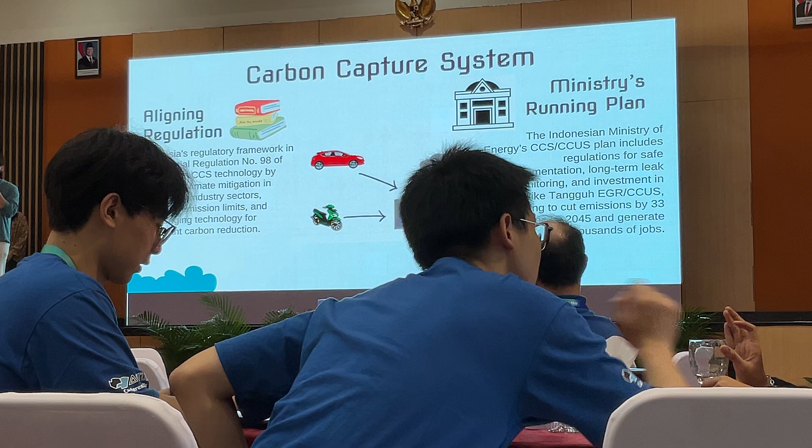So if we want to convert all public transportation into electric, won't we need more power plants for that? Correct. And by needing more power plants, doesn't that mean more emissions? Correct again. But the difference is, if we concentrate the emission at the power plant, we change it from a distributed source—the vehicles—to a concentrated source—the power plant. So what's the benefit? There's a technology called carbon capture system, which, just like its name, captures the carbon from the concentrated source. This is actually aligned with our 2021 regulation, which greatly supports carbon emission reduction.

Then there's our ministry's running plan, which, if the project succeeds, will create thousands of jobs while also reducing emissions by 33 million tons. So it's not just killing two birds with one stone, but killing many more.

So why don't we all just sell our cars right now and buy Tesla Cybertrucks? Because it's too expensive. But there's a recent study from Antara News showing that over the past 15 years, battery prices have declined by over 90%. And Goldman Sachs, a renowned American investment company, predicts it will drop by another 40% by 2030. So it will drop even more.

And our government, through PLN—an organization we visited yesterday—is creating over 600 charging stations right now, targeting 25,000 by 2030. So availability for electric vehicles will increase even more.

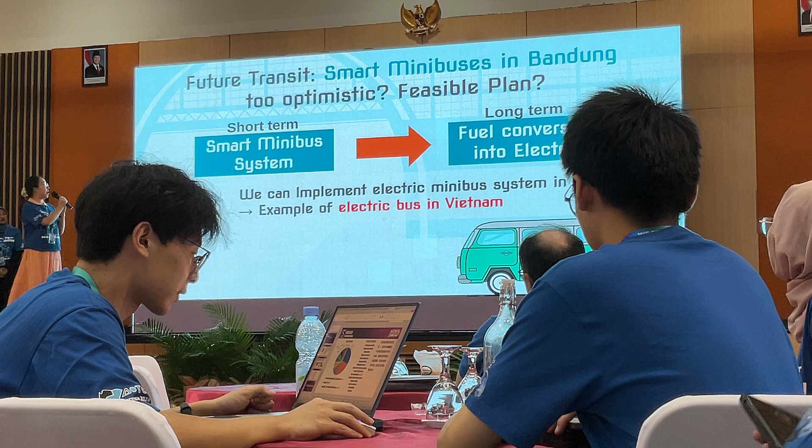Okay, so far we talked about the future transit smart minibuses in Bandung. So as a short term, we suggested a smart minibus system. We focus on the convenience of the minibus. We want people to use public transportation rather than private vehicles.

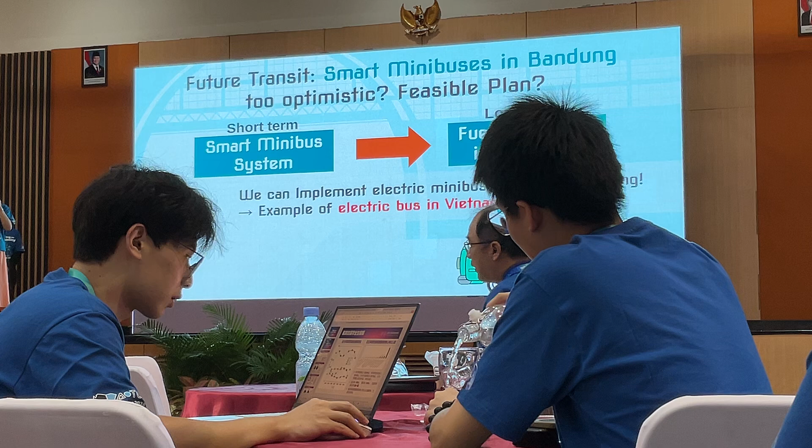And in the long-term plan, we focus on the fuel conversion into electric. So we want to change gasoline minibuses into electric minibuses for a more sustainable energy way. So if we can accomplish these two plans successfully, it is obvious that we can change Bandung into a more sustainable and safe road situation.

But isn't it too optimistic? Is it really a feasible plan? Actually, we can do it because there is already an example in Vietnam. Vietnam is already using electric buses as a transportation method. So let's move on to Vietnam.

Thank you for your introduction. Now I'm going to tell you about the electric bus in Vietnam, its effectiveness, and the sustainability of our solution for Bandung minibus energy.

It's very friendly to the environment. Second, according to statistics, Hanoi's introduction of electric buses is reducing around 40,000 tons of carbon dioxide emissions, which is equivalent to 1.68 million trees. Impressive figures, right?

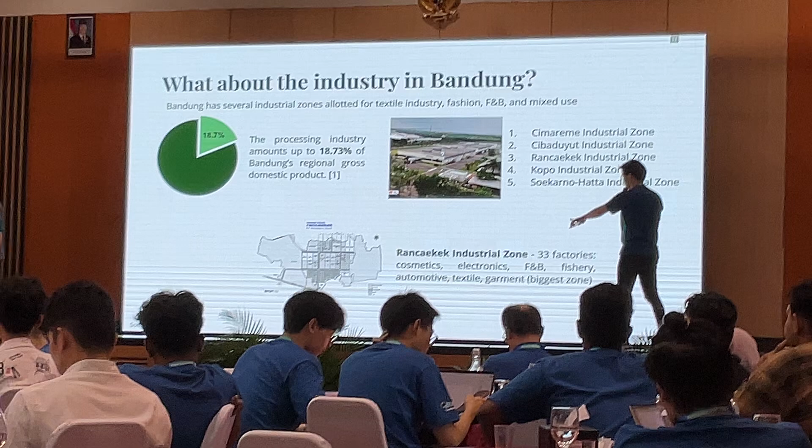We will focus on Rancaekek Industrial Zone, consisting of 33 factories doing cosmetics, electronics, food and beverage, fishery, automotive, and most of all textile and garment.

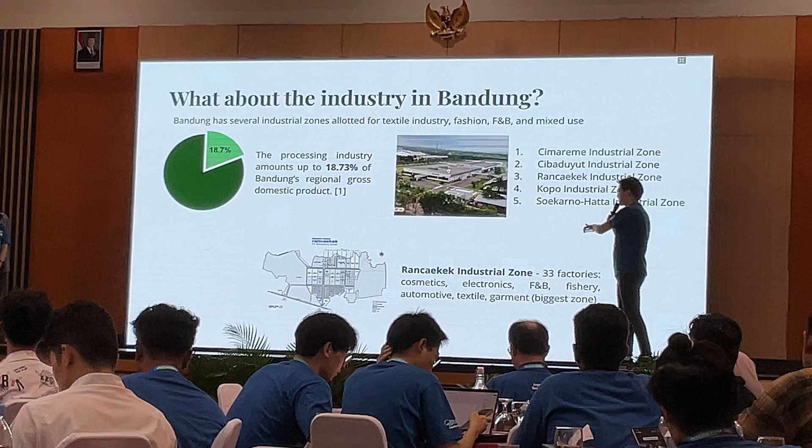But the problem is Rancaekek Industrial Zone is currently experiencing up to 60% decrease in groundwater levels. This indicates very intensive groundwater extraction, meaning the factories were found to be fetching groundwater more than the permitted amount, or more than they are allocated for.

Because of that, demand is substantially larger than the supply, and the groundwater level is steadily decreasing, even until now. So this is the issue that we focus on.

Groundwater crisis can be divided into three aspects. First, industrial water use, because the industry is using more and more water and the water supply is depleted.

We also have reduced absorption area because developing industries need buildings. When you build on top of soil, you compact the soil, reducing its absorption capability, and you also have less soil area for water to be absorbed.

And we also have deforestation. We need to clear land to make more space for buildings, for the industry to thrive. So this is the problem we are facing right now.

Let's look at the global solutions. Of course, we will look at specific solutions and practices, but these are hard to implement because China, Japan, and South Korea all have different culture, different technologies, different capitals, different political situations, and different education backgrounds. They are all so different.

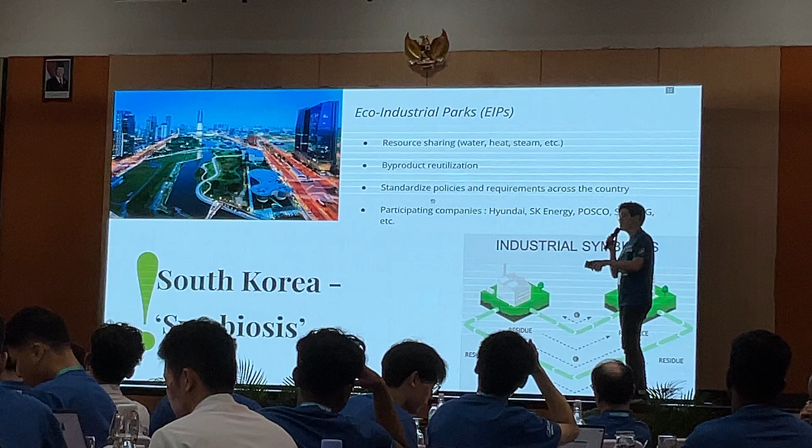In the Eco-Industrial Parks, we have resource sharing. Water, heat, and steam is shared between companies, industries, and factories. This is made possible because in EIP there is an extensive underground network of water, heat, and steam sharing systems that allows companies to do so.

They also do byproduct reutilization. This company sends their residue or waste to another company to be used as raw materials. This company doesn't have to worry about waste disposal, and that company doesn't have to worry about raw materials.

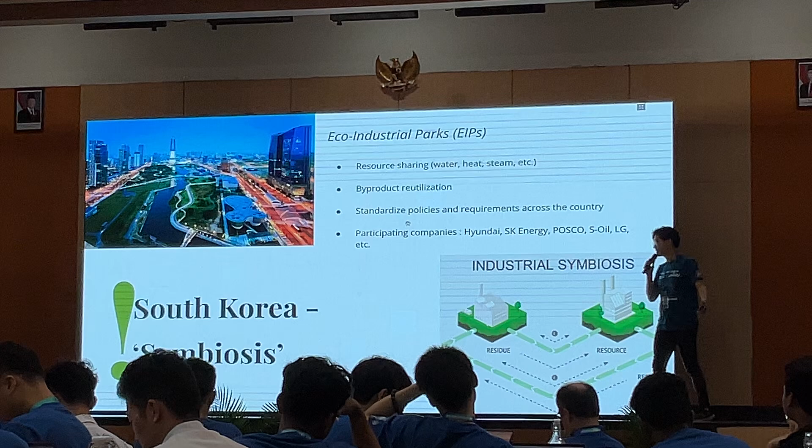Win-win solution. These EIPs can also standardize policies and requirements across the whole country. You don't have to enforce your policies on specific factories or companies, but you can enforce them in specific parks, which makes your job a lot easier. Participating companies include Hyundai, SK Energy, POSCO, S-Oil, LG—large companies everybody has heard of.

Next we have Indonesia. Indonesia has also been doing these things and is heading in this direction, joining UNIDO's Global Eco-Industrial Parks Program, GEIPP, in 2020.

Indonesia is also building an energy management system through the Benefits project. One-third of industrial parks plan to use solar photovoltaic cells and bioenergy, implementing that into their energy mix, and also following China's optimization scheme, adapting advanced manufacturing approaches, benchmarking against China.

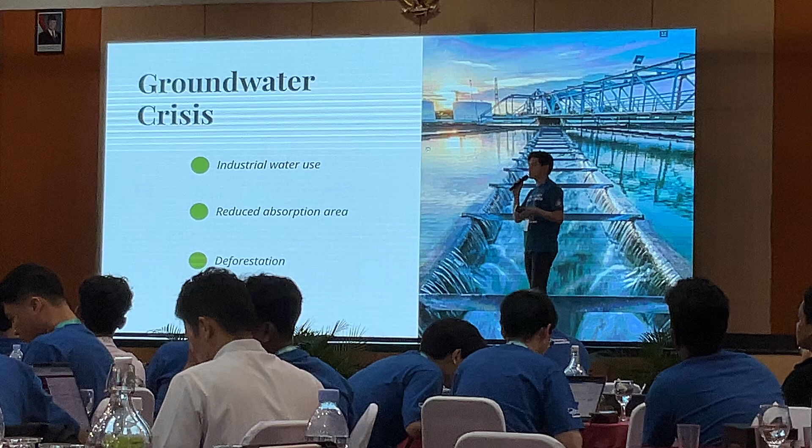Next, I remind you again of the problem in Bandung. Let's go back to Bandung for a bit: a groundwater crisis caused by industrial water use, reduced absorption area, and deforestation. How can these global solutions, these themes, help these issues? We propose some solutions.

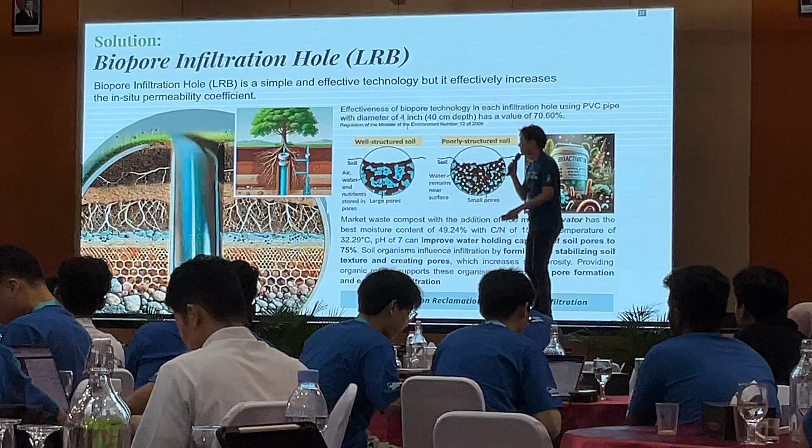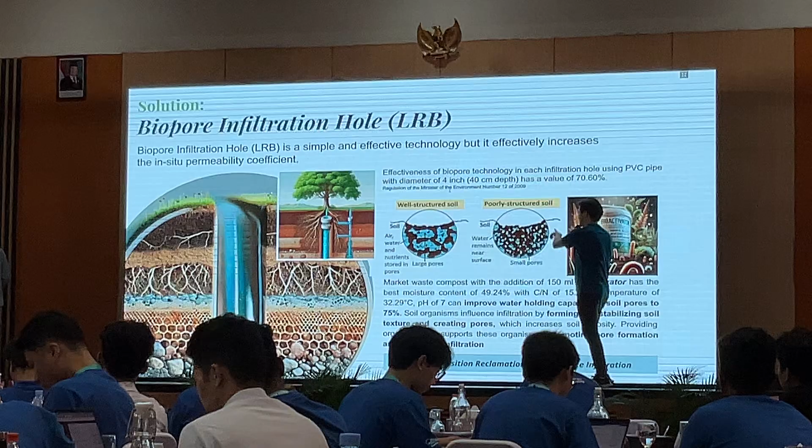First solution: biopore infiltration holes. This is a simple, cost-effective technology that increases the local permeability coefficient so the soil can absorb more. As the soil gets compacted due to industrialization, we need to recover some of those pores—we can just make some more holes, which improves the soil's ability to absorb water mechanically.

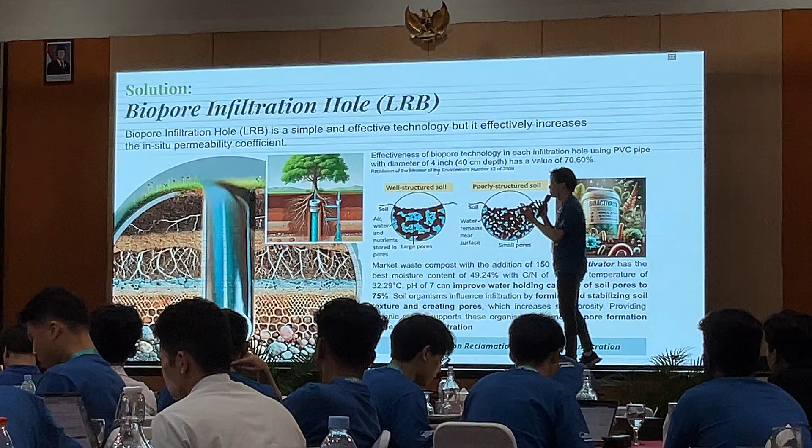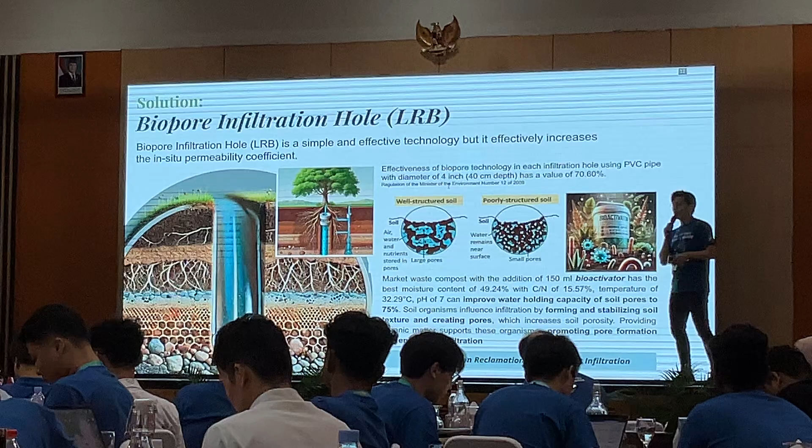We can also improve absorption non-mechanically by adding bioactivators. Joining mechanical and non-mechanical ways, we can improve the water retention of the soil and its absorption coefficient, optimizing the existing process. The soil can already absorb water, but we want to optimize it and maximize infiltration, following China's optimization mindset.

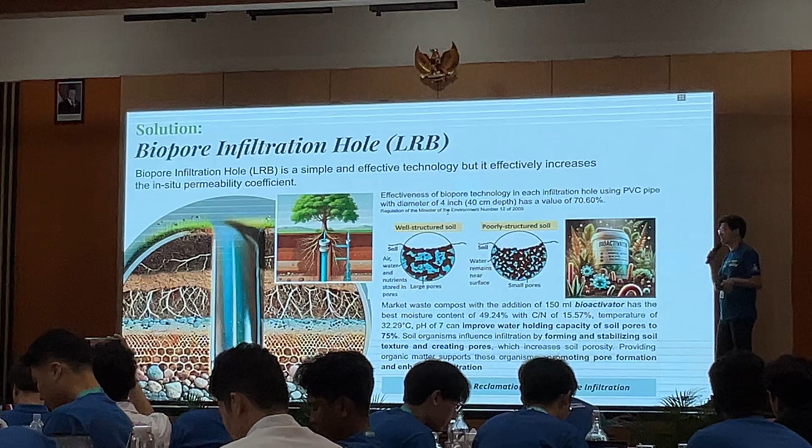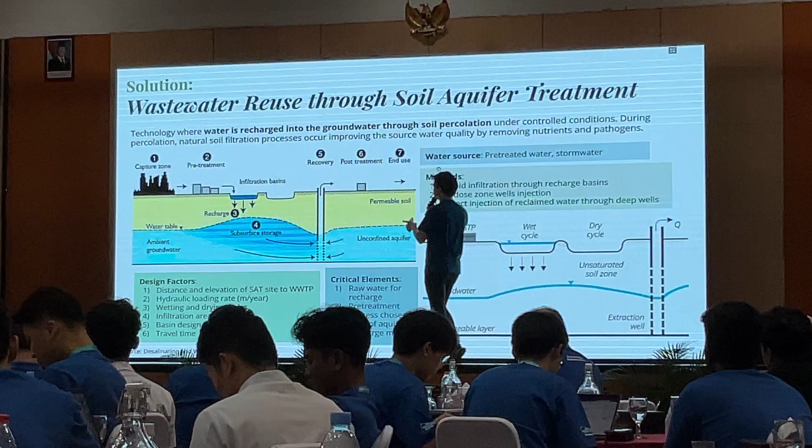Next, let's expand our scale a little and think bigger. We have soil aquifers, where we force water back into the ground by collecting it and letting it drain through the ground—here we have natural filtration.

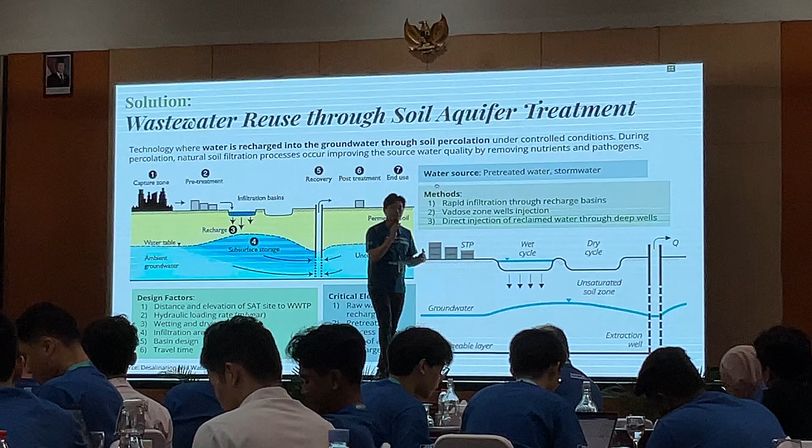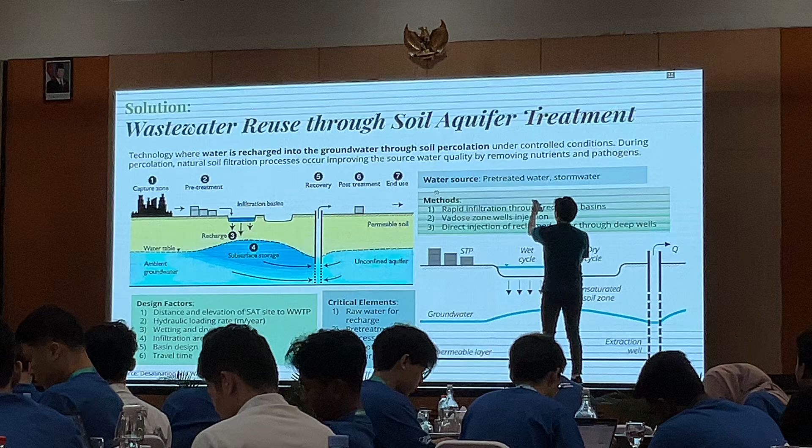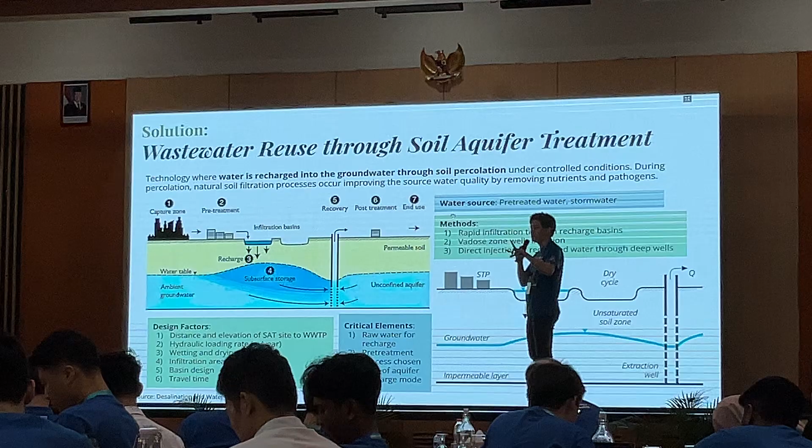But now, since it's a bigger scale, we need the help of the government to centralize and support this effort to make it possible.

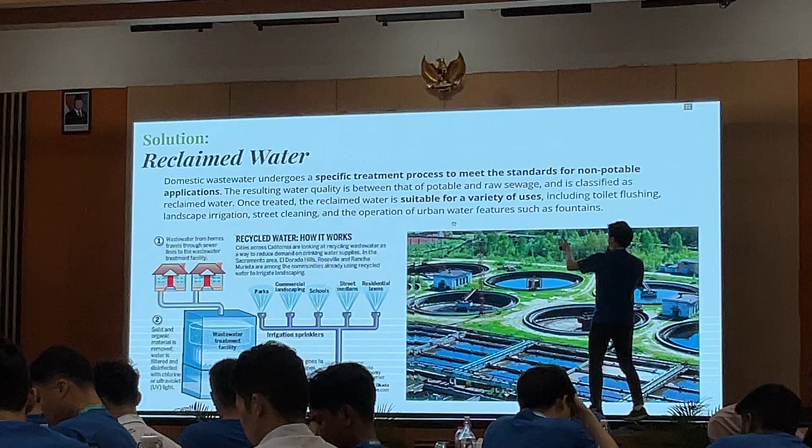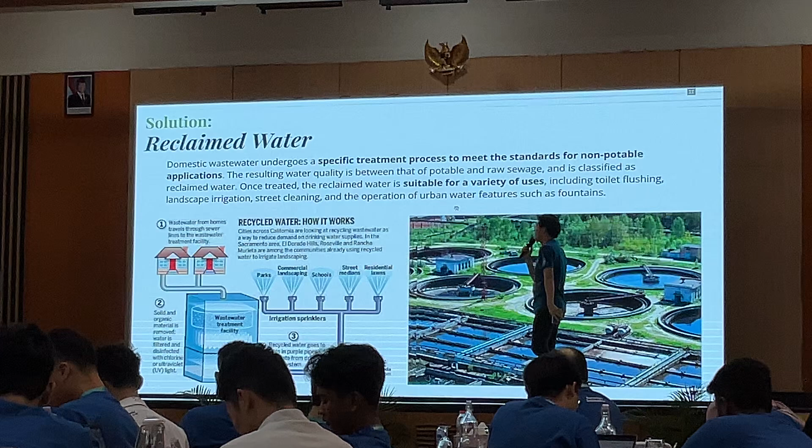Next, reclaimed water. Wastewater can be treated to meet standards for non-potable applications, such as toilet flushing, landscape irrigation, street cleaning, and other domestic uses. But I want to focus on industrial applications.

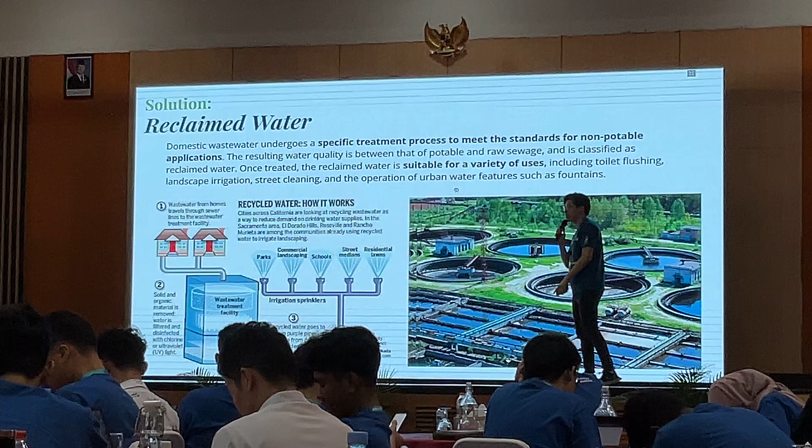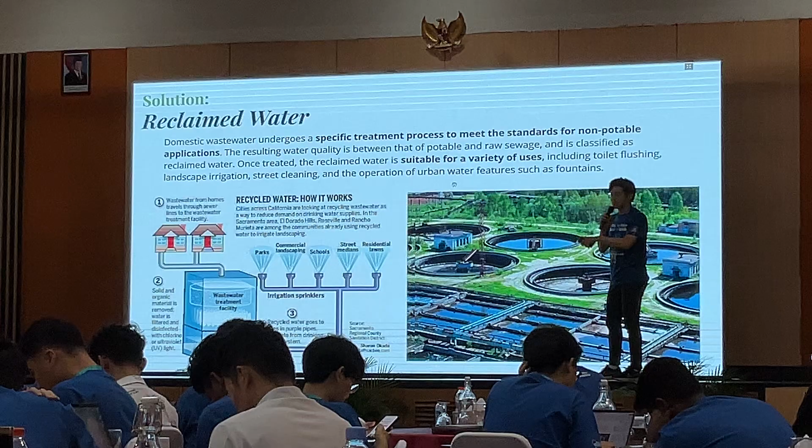I want to use this non-potable water for sharing between industries. Wastewater from one industry gets treated, and if possible, reused by another industry, creating industrial symbiosis. Since this water treatment plant is not cheap, we need the help of the government.

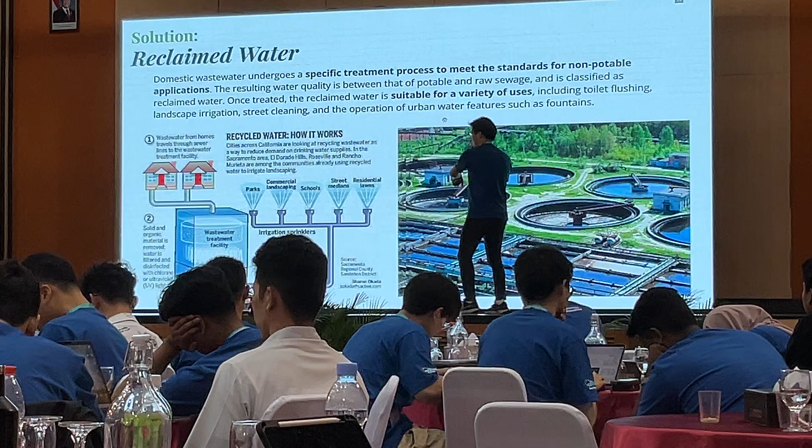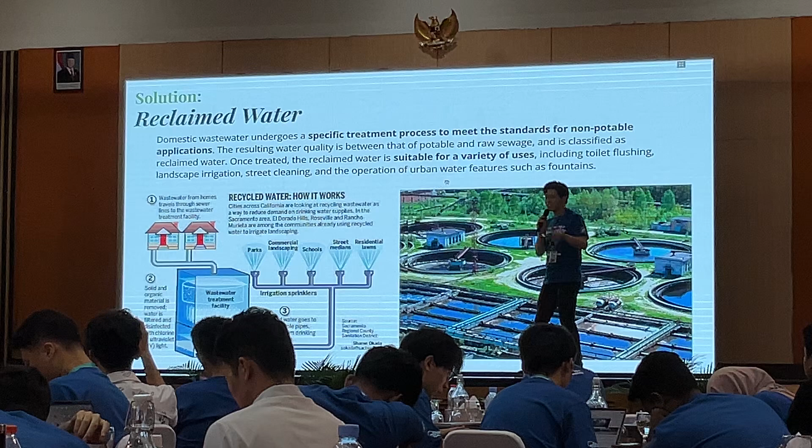But not only that—there's also benefit from this wastewater for the companies. Companies that join this wastewater program, this wastewater network, should be able to invest in this wastewater facility because it will reduce their costs. Now they're incentivized; now they have something to gain by investing in this wastewater system.

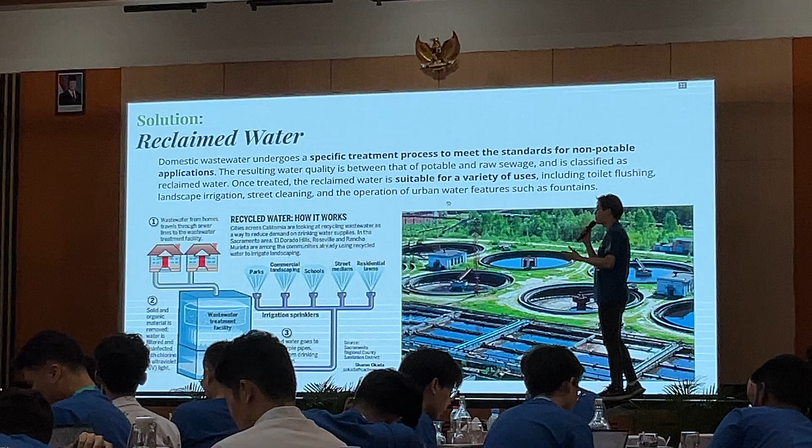This naturally encourages companies and industries to invest, helping reduce the cost the government needs to supply to the systems—again emphasizing industry symbiosis and centralization.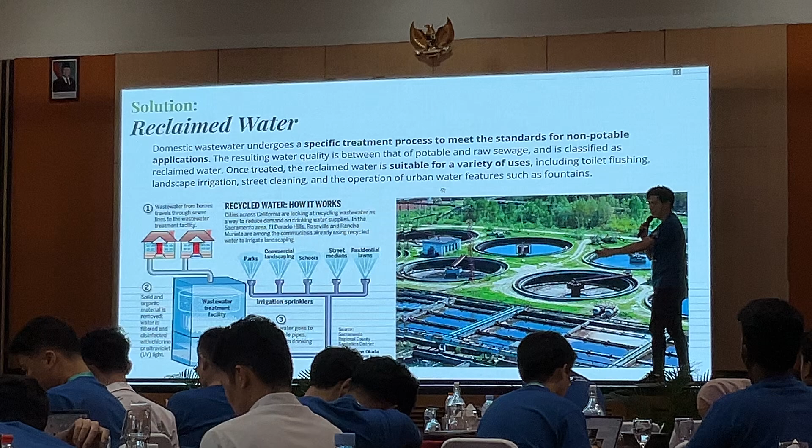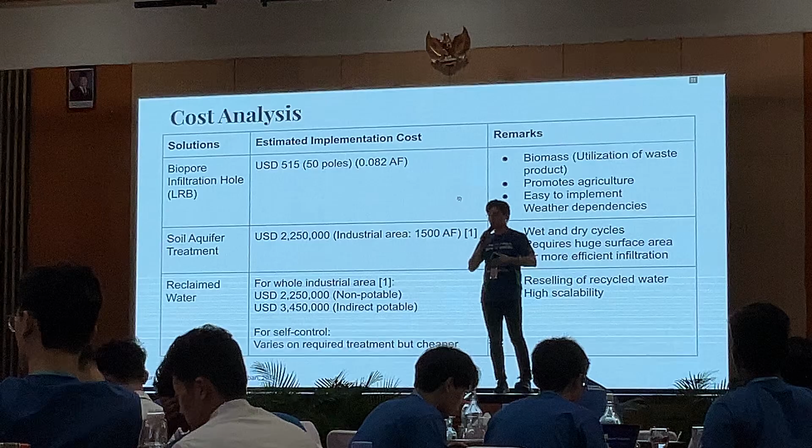Everybody can use them and implement them in the industry areas. But for aquifers and reclaimed water, you can see it's relatively a lot more expensive. This is where we really need the government to step in and centralize the whole thing. Of course, for biopores, we also need the government to socialize and give information properly. But for aquifers and reclaimed water, we need the government's help.

So for conclusion, we have wastewater management and reutilization, promoting symbiosis, resource sharing, and also low effort, high impact initiatives to optimize the soil's absorption capabilities. Implementing these two can help solve the groundwater reduction problem. But to make these two work together, we shouldn't forget the role of centralization. The government is important in supporting these wastewater management facilities and incentivizing companies and industries to invest in this technology. The government needs to make a network that can socialize and let people know that this is an easy and viable solution.